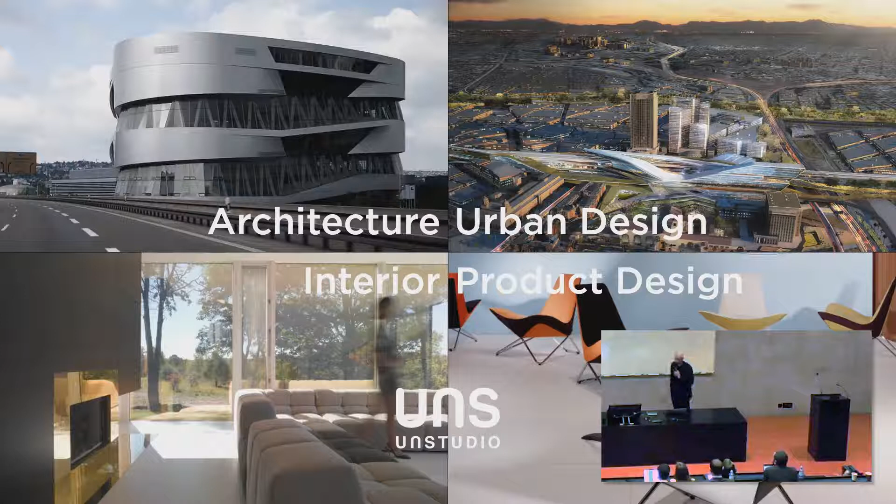Quickly to introduce UNStudio, we are an international company active for more than 30 years. We work in a very broad field between architecture and product design, so we have a really wide span. And what we usually consider ourselves doing, apart from facing the architectural challenge, is that we actually try to challenge architecture.

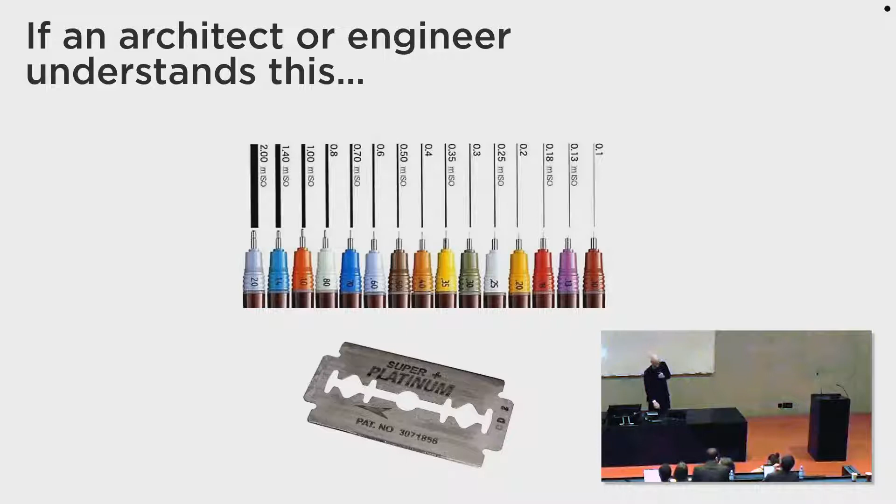I have one question because I started my architectural career at the beginning of 2000, so I'm a little bit from the older generation. What I usually ask to test the temperature in the audience is whether you can relate to that image on the screen. If you can raise your hand, if you can understand that relationship, please. Okay, so it's like 50%, I would say. So you are old, unfortunately. For architects and engineers, there's a similar relationship. Could you raise your hand when you understand that relationship? 1, 2, so a couple. Great. Also here it's the same.

You're unfortunately old. Today I want to discuss a little bit, or let's say my presentation today will be based on a conversation between Tim Melbourne from Made by Many, Oliver Marlowe and John Marshall. They had a very interesting discussion about the ways we design and also what we are designing for, because this very much relates to our own practice.

We of course design for emergence. We have seen this already in the past. We have been designing a lot for complexity, but this is also very apparent because complexity is more and more increasing. We need to be adaptive nowadays, and everything we need to do in collaboration. So I would like to start from emergence.

It's quite clear that anything we do today, also looking at our own projects, is mostly spanning over 10, 15, 20 years, depending on scale and complexity. So you can simply not just expect that what you think of today will be future-proof 10, 20 years down the road. One of our oldest projects actually started in 1996 as a competition and as a master plan, and we just finished it 2 years ago. So there's a long process relating to it, and we need to be aware of that.

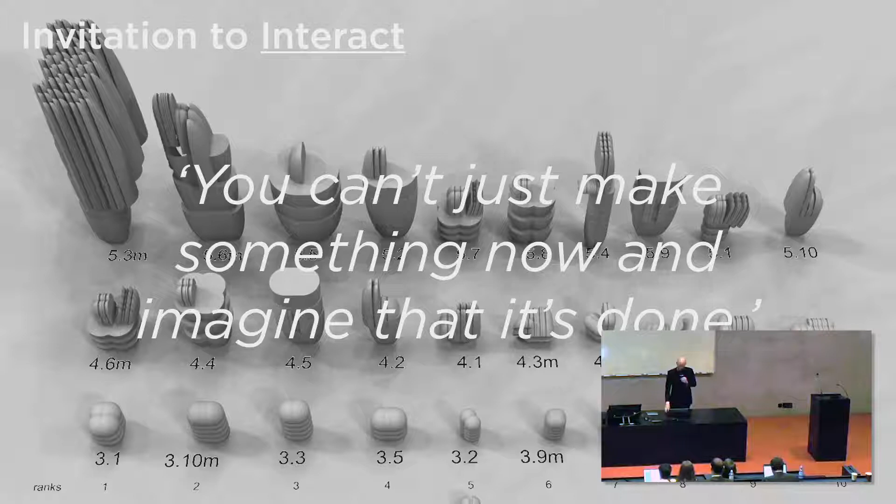And then during the way, there's of course an invitation to interact. So there's a lot of interaction and modification needed, also looking at the markets. When you look at the market, it's not always very clear, and it's not always very understandable what are the driving parameters that really let you estimate and make assumptions for the future. But one thing that is always very apparent, what we noticed in our experience, is that mobility and infrastructure is one of our main focuses, but this is very, very emergent. There's a very high demand to make people mobile and also build the right infrastructure to accommodate this.

So this is the project I had mentioned before, which we started in 1996. It's basically a big transport hub in the city of Arnhem in the Netherlands, on the edge to Germany. It's a bit of a big node where a lot of things are happening in terms of transportation. All the international trains are coming in there. There are buses that need to connect there. There's a lot of pedestrian traffic. So it's a very big machine, so to say, of transportation that we had to think of in a new way.

So there are many components we had to combine and that we had to layer. After we had intensively studied the passenger flows and also all the transport nodes, we actually proposed this new transfer machine, so that we can really think 20 years down the road in order to meet the demands of the 21st century.

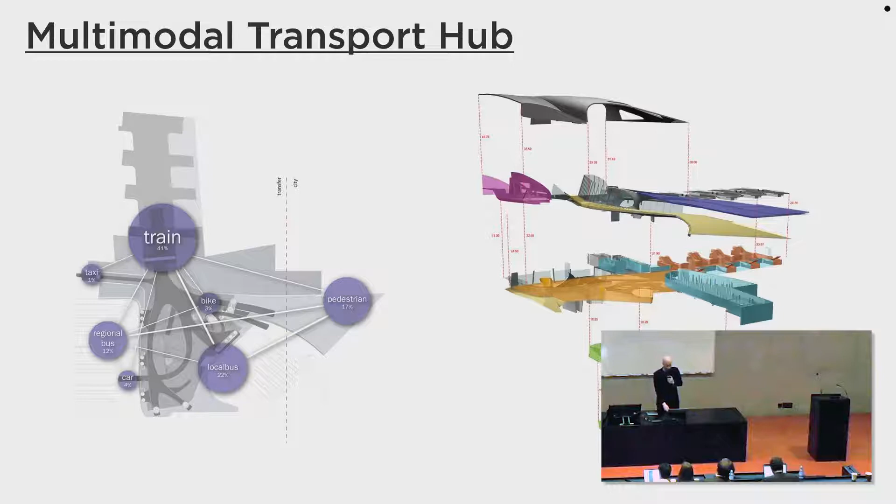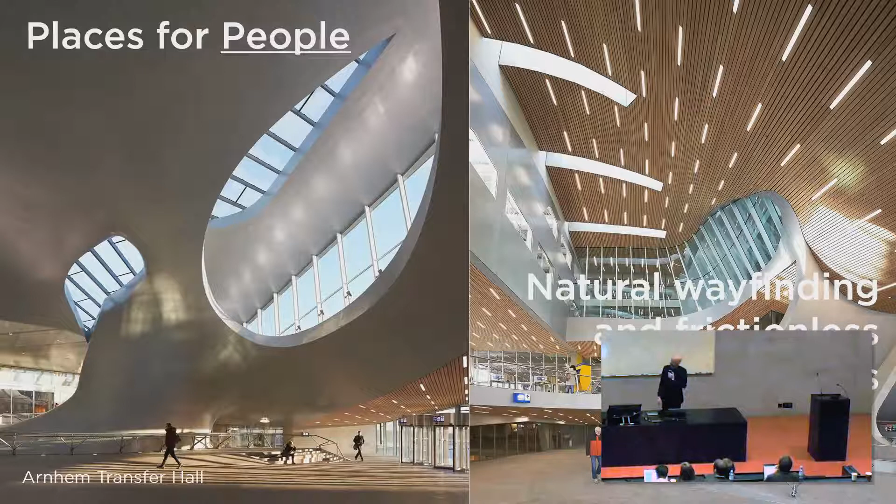So this is basically our transfer hall in Arnhem. It's basically a column-free space. It's the heart of the project, and it forms as an architecturally designed expression. It facilitates an intuitive movement throughout the space.

This allowed us to really reduce the wayfinding. Comparing to that image you saw before, which is simply just wayfinding, we managed to facilitate, through architecture and gesture, the way people move through space. We were able to reduce the actual literal wayfinding by less than 30%. This gives us a seamless experience for people, and allows us to give the places and space back to them. In the way you organize the space, you create a platform for people to interact with the architecture. You'd be quite surprised what happens there.

Same goes for our Mercedes-Benz Museum in Stuttgart, which basically started as a company museum. In the end, it turned out that they are now hosting more than 300 events a year in this place. So it had this additional layer of function and functionality on top of what we had designed back then.

So when we look at it, there's a certain convergence along the way, in terms of where we come from. When I still started to draw by hand, I bought one of those drawing tables, which I used for roughly a month at the beginning of my studies, and then I turned over to the computer and used my drawing table as a base to build physical models. Our CEO used to say, from the architecture point of view, we are kind of in the iPhone age. When we look at industry and go to a construction site, we every now and then face people who are more in the Walkman age.

That said, this convergence is basically turning around every now and then. Wherever you work, because we work very internationally, it depends what the technological standard is. But mostly you need to tailor for the local conditions, and comply with the actual building standard. We have seen over the years many different standards along the way, so you cannot always just get through with digital and technology.

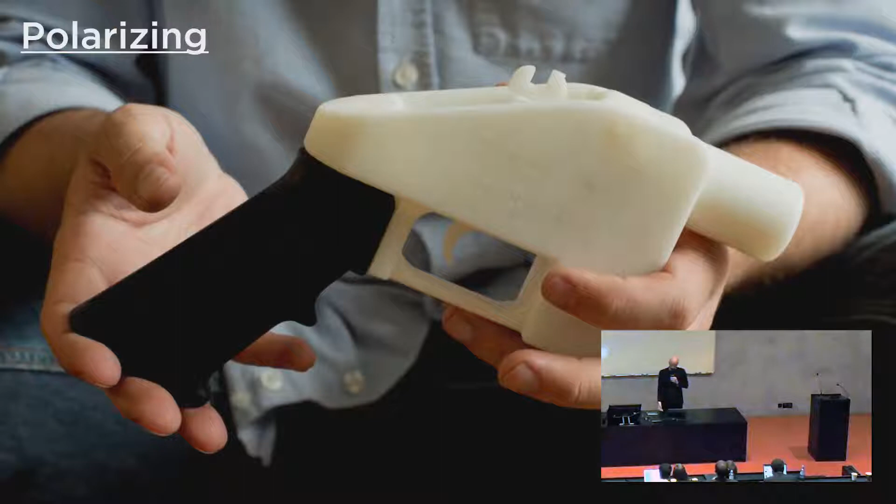Of course, there's also a polarizing factor to it. It also enables you to generate new technologies, or adapt technologies in your home, in your living room, that might be a little bit provocative over time.

There's a lot of hope for artificial intelligence, of course. Until we have solved certain things in AI—probably we'll hear more about it today—whether we have solved the difference between fried chicken and labradoodles. But I think there should still be a human notion to the way we work and the way we design.

When we look at the drivers, just to give an idea, when we start a project, we can come from a very broad angle, and every contemporary architecture firm has to take this broad approach. You always have to develop a concept and a design. You want to be functional, innovative, you want to please the audience or your client. You want to make sure it's an efficient building, properly used, with the post-occupancy really in place. You create new business opportunities and so forth. So it's a very big field of parameters to consider. In another question, you could ask yourself how you want to eat an elephant—you would actually chop that elephant into little pieces.

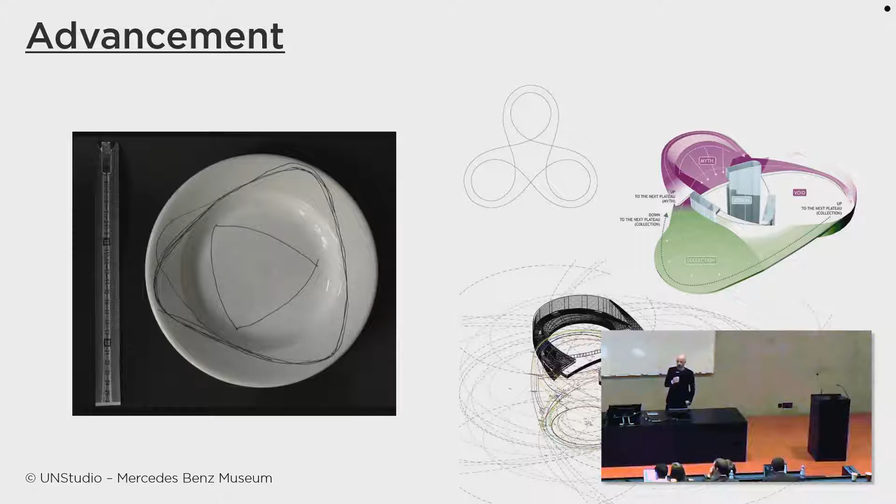When we start our design processes, we always go through a process of resolution. We start from mostly bold ideas, big details—what is our main design objective, and how can we further give resolution over time? When you look at the very first concept for the Mercedes-Benz Museum, on the left, this was basically one of the first ideas, the first sketches, just on a plate. On the right side, you see the kind of complexity this turned out to be.

The Mercedes-Benz Museum itself is a place where we actually combined certain elements in a single gesture. I have been talking about the intuitive flow - this is something we very much followed in this principle, or in this organization of the building. It was a new approach back then in 2002, if I remember correctly. This building fascinated me so much that I had to start working for this company, and it still is one of the most fascinating buildings for me.

The biggest challenge here was the continuous flow, paired with German building regulations - you face hard resistance on fire life safety. So we have this central void where all the program is woven around two strings of program. As you circulate through the building, you constantly move between the outer perimeter and the inner atrium, creating a strong notion of diagonal views and interconnection of spaces, and also understanding and orientation. The biggest challenge was basically not needing to compartmentalize in terms of fire.

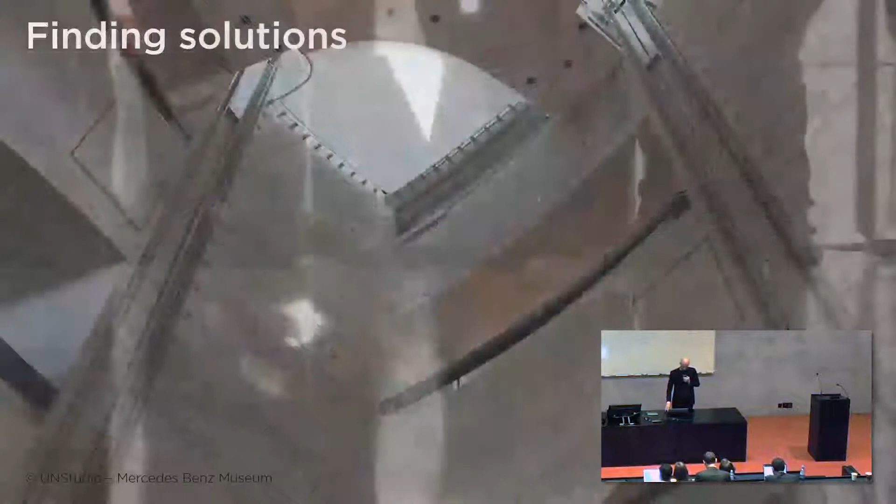So what we, or the team back then, came up with is basically to use the internal atrium as a funnel to, in case of fire, extract the smoke from the inner space, so we wouldn't need any fire shutters or smoke curtains that would diminish the architectural quality. So I would like to play a little video, if it plays.

Just to show you how it was solved in the end.

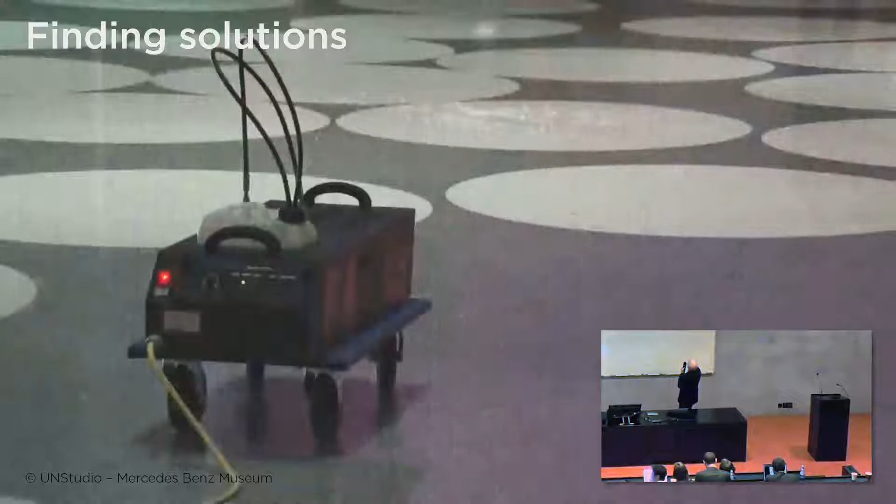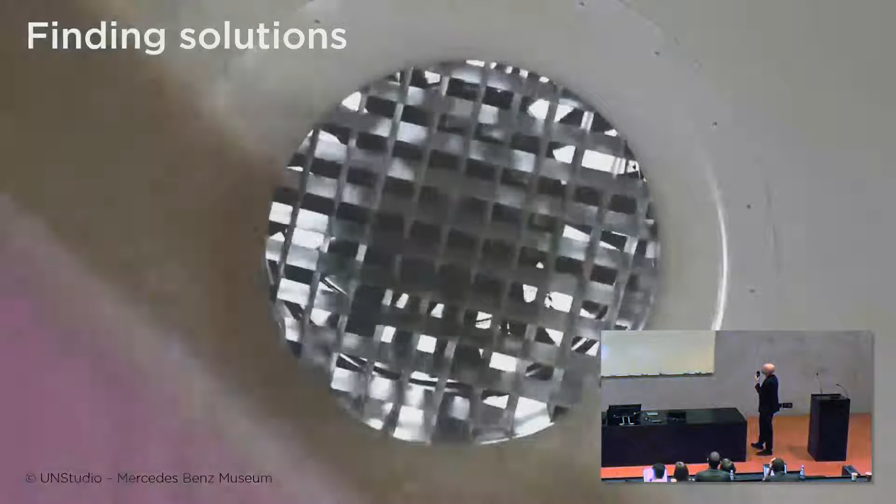This inner atrium is quite important for how you get started into the exhibition - you move upwards. The exhibition itself starts top to bottom, in what they call the prologue space - the before, or how you get into the cultural heritage of the company. Then at the very top, you first meet the horse, as the pre-engine stage.

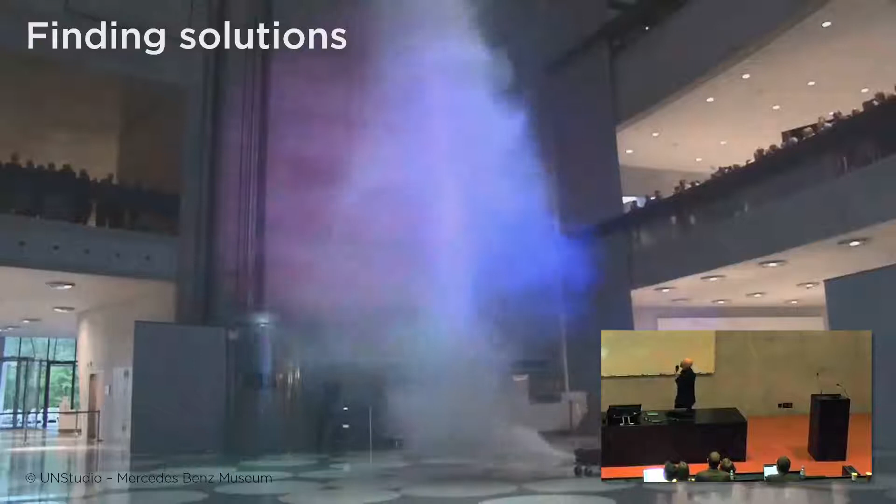Around this atrium, there are a couple of nozzles placed that create an artificial air movement within the space. This air movement moves all the way up, carrying the smoke with it, which is then extracted at the top, in the center of the space. What this generates is, on one side, a very spectacular system.

It allowed us to convince the fire department that this is really a workable solution. Of course, we hope this case will never happen, that this building will never be on fire. But back then, it also created a question to the regulation, in the sense of what are the new ways of thinking about these regulations.

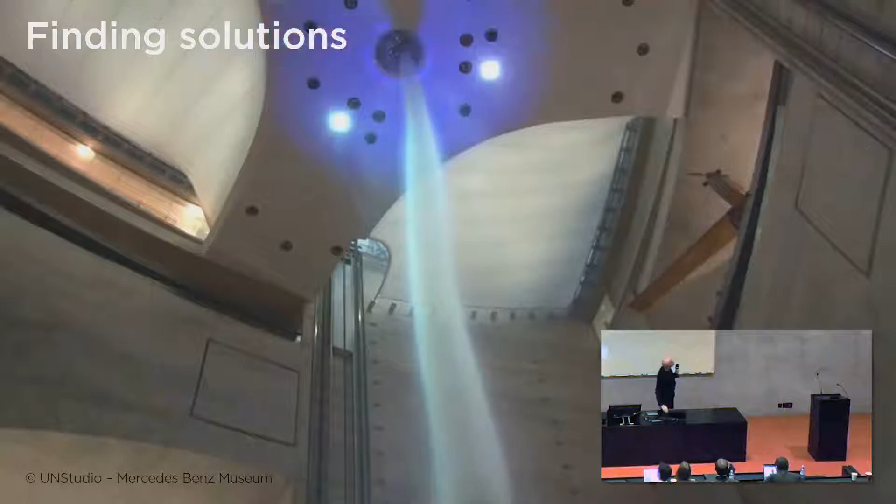It's located in Hangzhou. Up to today, it's still our biggest project, with 400,000 square meters of space - anything you can imagine is in there. It's basically a city in the city, two towers of 250 meters, and we started this in 2007, just after my graduation. We delivered it in 2017.

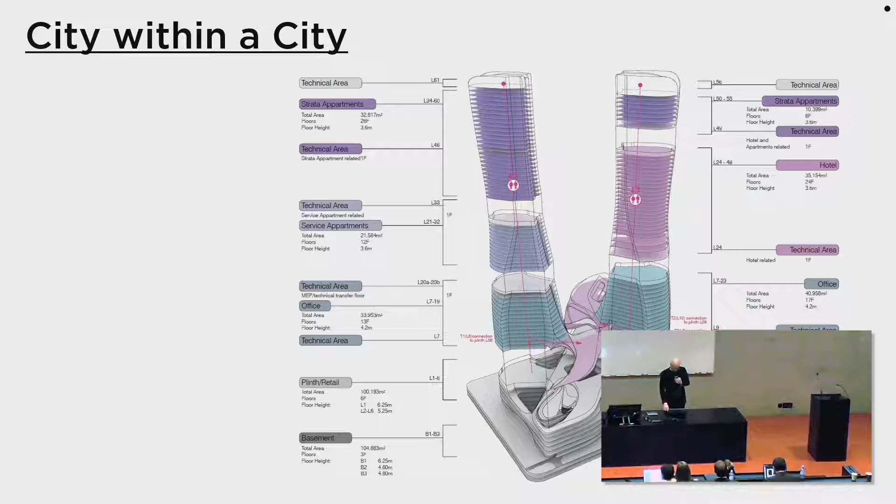Looking at the program mix, as I mentioned, it's literally a city in the city - there's nothing in there that you can't imagine. For today, I'd like to focus on how we actually developed the envelope of this animal. I was talking about the elephant in the beginning, and how we had to chop it up into pieces in order to progress with the design work and get it onto construction.

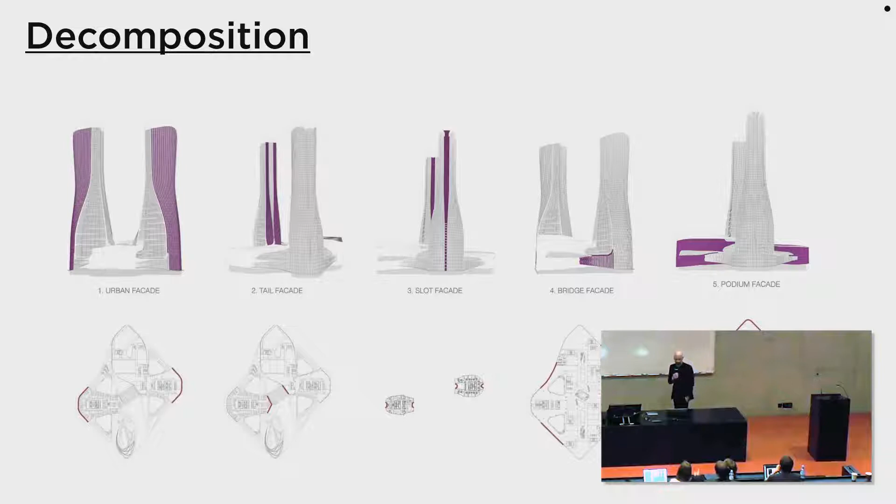So there was a certain process of decomposition. After we had formulated the concept, unified the plots, organized the program and all the flows, the massing was there and the main gestures had been designed or defined. We then had to break down the facades into different components, and based on that, also deliver certain strategies for how we could approach it digitally and technically.

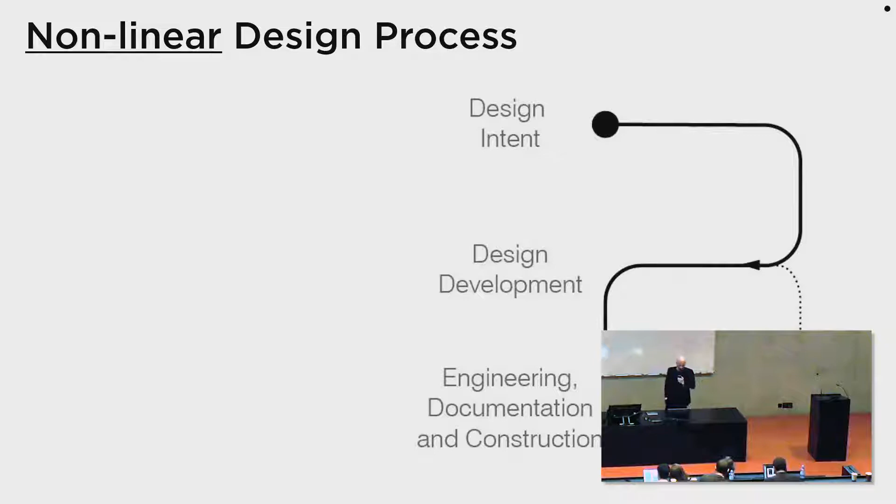So we look at it, again, retrospectively, as a non-linear design process where you actually come with a bold idea. I showed this before with the Mercedes-Benz Museum. You have this plate with a sketch on it, but you need to bring this onto site, and think of all the processes behind it in order to talk to the Chinese contractor that can then, in the end, build it.

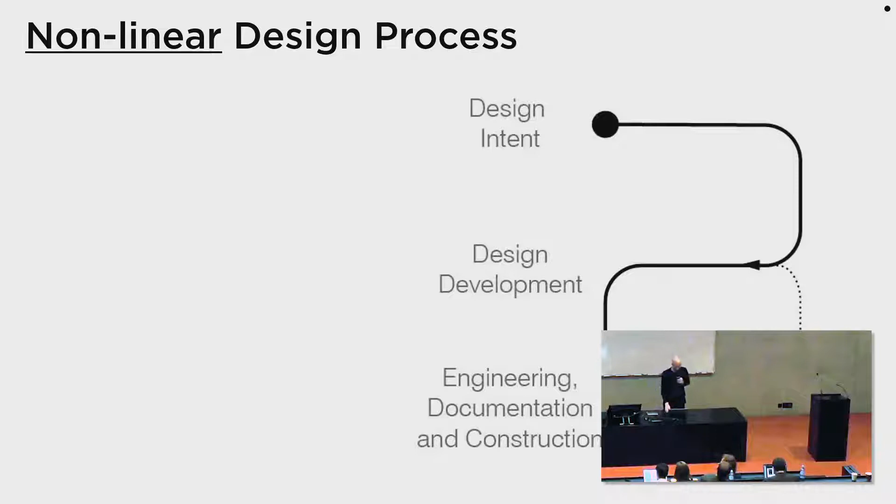So we have this design intent phase where, of course, you can think more boldly. I was talking about the resolution. This is where you spin the ideas. Next stage is the design development stage, and then you circle this through engineering and documentation to construction.

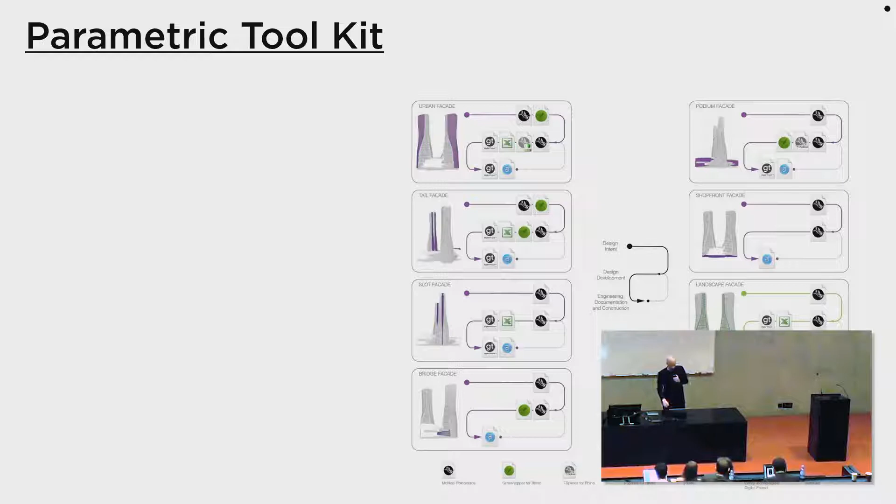So what we had done back then is we developed a kind of parametric toolkit for this. For each of the facades, there's a certain process for particular stages of the design, and this we had to really do case by case.

So I want to throw a little light on the urban facade, which we called urban facade because it's literally facing the urban context, and it has a nice contrapposto gesture, unifying, or let's say moving the flows from the urban placement along the tower.

And how we did this back then, in the first stage during the design intent stage, we were simply modeling in Rhino by hand. It was in the beginning of the Grasshopper plugin, so there was a lot of intuitive form-finding process and so forth.

In the next stage, we further developed our toolkit by actually programming. Back then it was still VB, Rhino Script, and Excel—a very powerful tool, we still use it today.

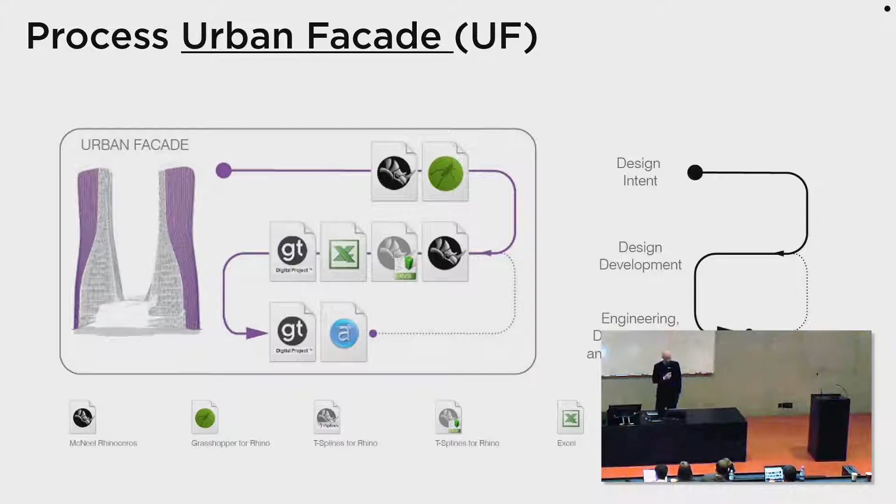It's basically, let's say, top of the bill, but also a very complex piece of architecture that needed a lot of expertise that we had to bring in to do this, because we were just stupid architects back then and not really programmers. And then in the end, this turned out a lot of data that we could use to formulate geometrical data that could be used to start construction.

When you look at the main parameters, I have a little video. If you think about this high-rise tower, you have a lot of stacked program. There are a lot of parameters that play into it, like the floor-to-floor height. You saw that the tower is actually wider at the bottom and more narrow at the top, so we also needed to play with different glass widths. We wanted to have it three-dimensionally curved, so we had tilting and turning in different directions.

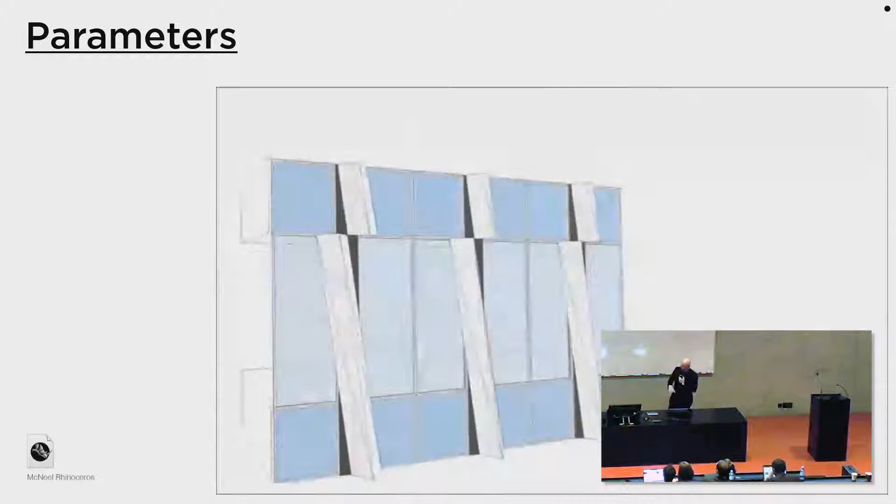Floor packages—in the bottom, for example, you have offices, and in the top, you have residential, so you also need to consider how you react to that. Sun shading is very important for Hangzhou. We have external fins on the outside, which need to correspond to our design intent, but also have a certain thermal performance, rotation, and so forth. So this was a very primary set of the main parameters.

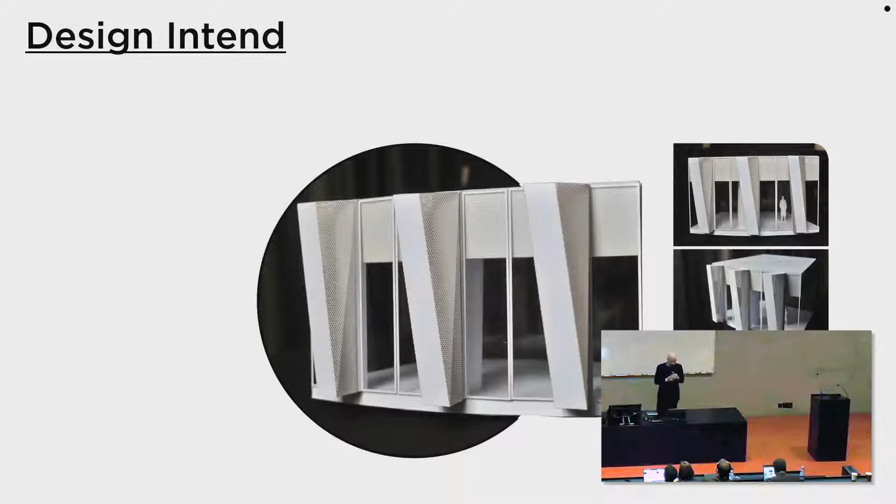Which we—back then, and we still do this today—always try to prove our concepts in physical models, just as simple as that. Very early analysis of the exposure and radiation.

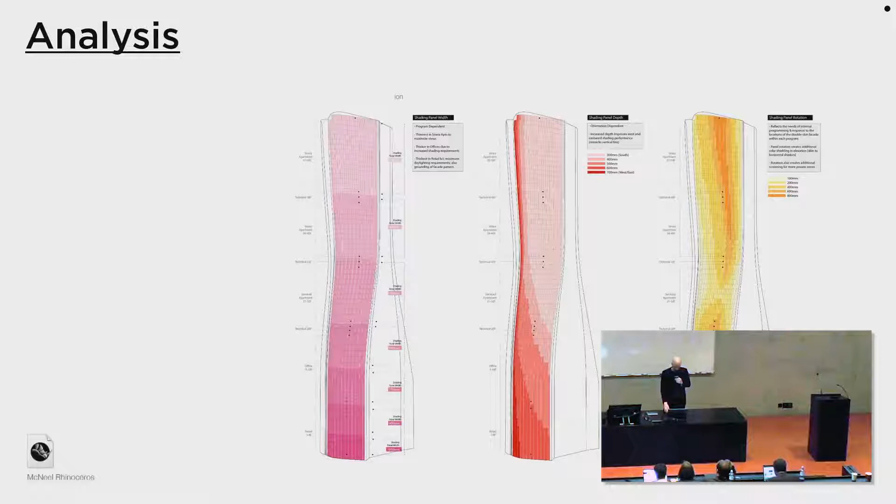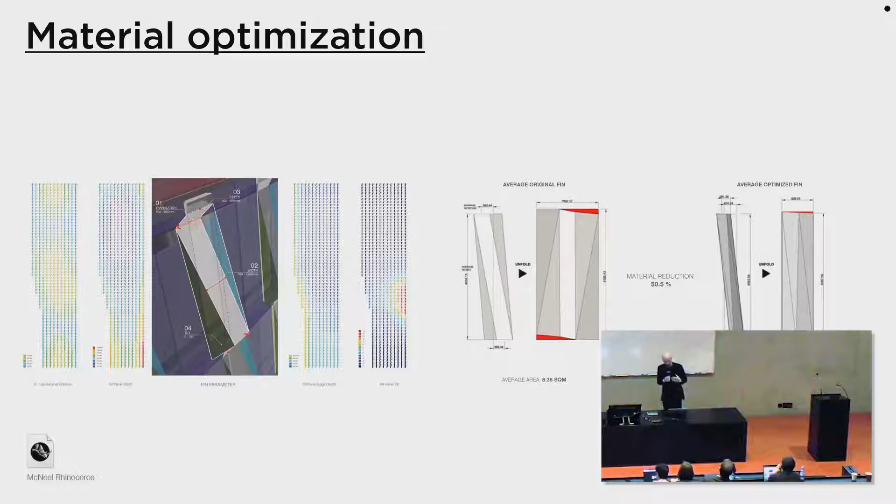And along the way, we already started to do material optimizations, because the client basically told us, okay, that's a great idea, but it's nice that you want to hang this element on the outside—it uses a lot of material. So just by using intelligent processes, we were able to really reduce and cut back the material by 50%, so we could keep our fins, and the client was happy.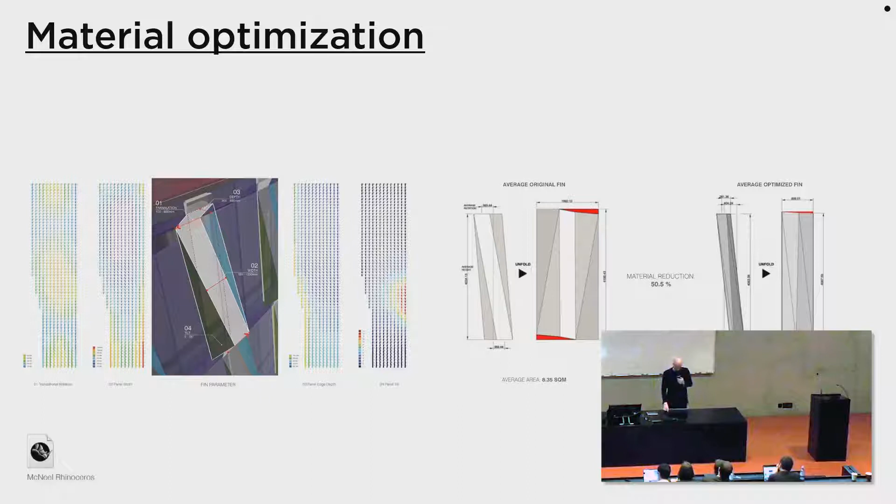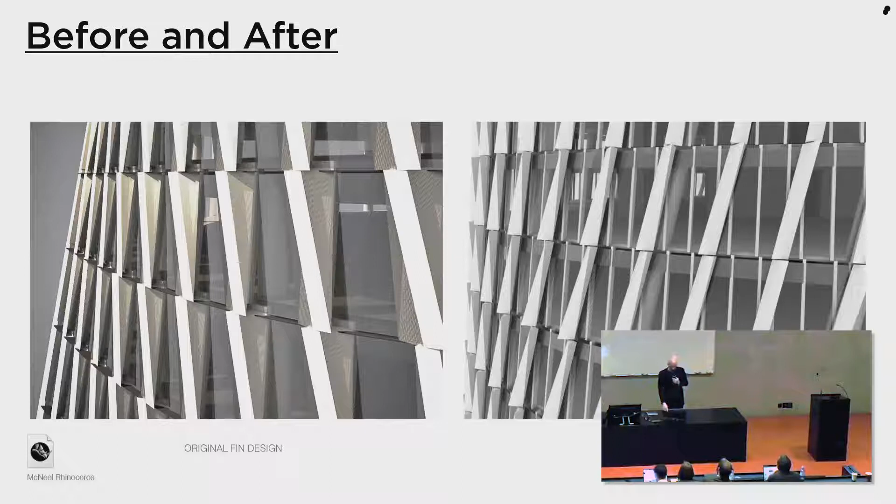You see here before and after how this was improved along the way. We are still in the Rhino stage, where we were still internally programming this ourselves, setting up the infrastructure for the project—the digital infrastructure.

Just an impression. So when we started this, this was one of the first lines of code that were written for the script. It ended up being a lot more lines of code in the end. It was basically a very early intuitive process, just subdividing, iterating, and trying to find the best kind of logic for how to really panelize the surface.

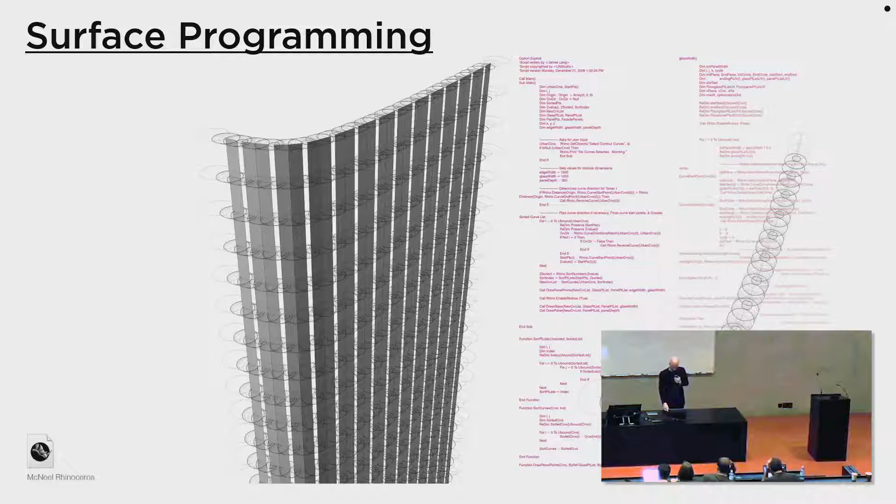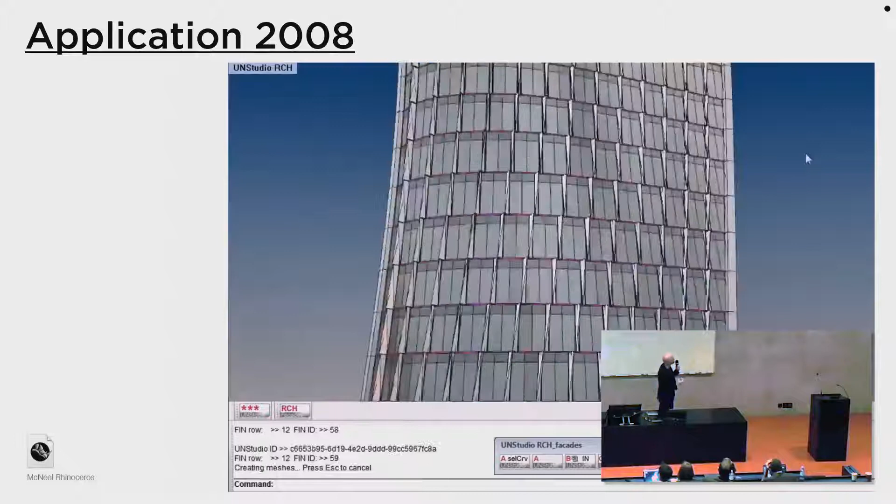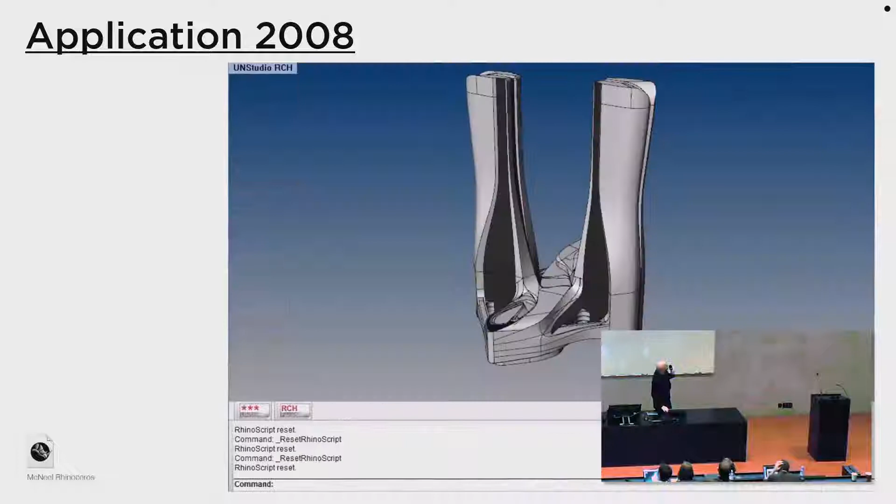I can show you this early application in action. So it's literally just height coordinates. You set out the levels, you have certain insertion points, and we have defined the components. Components always exist as two glass panels, and we combined this with a shading device on the outside, which was always directly linked to Excel so we could really read the data and analyze it at the same time.

This is what I had described before. You have to imagine, back then, this was actually the first kind of step into the history of modeling. Back then, when we were still working very intuitively in Rhino, you model something, and there's not really a history and a path to it that you can go back and forth on.

So this was very new to us, the concept back then. Working with this Digital Project, on top of CATIA, is to understand that you actually need to start from the very first point, and build it up with a certain logic and algorithm on top of that. But you can also move forward and backward. This back then allowed us to extract a lot of data from our model.

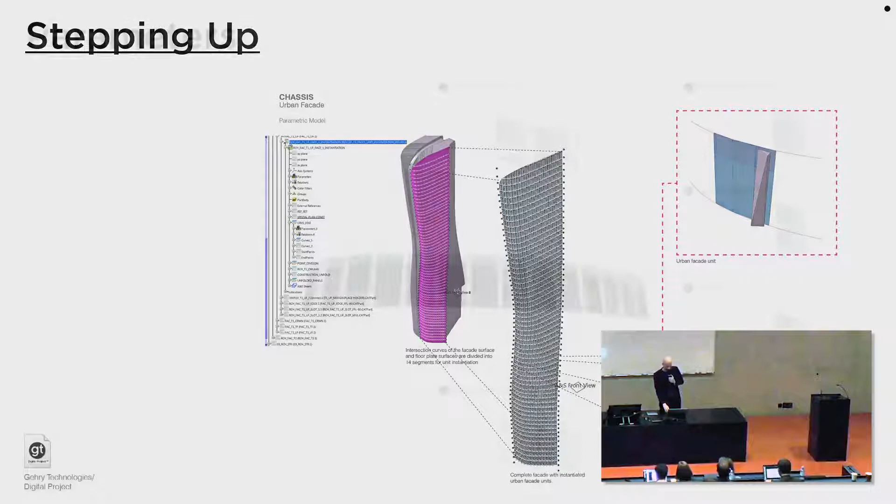So when we started to look into the urban facade, we had to break it down into certain parameters, because the client came back to us and said, it's wonderful how you've designed this, but we really cannot bring this to site, because all the details are different, all the mullions have different angles, and we'd need to do like 900 different aluminum extrusions for the facade contractor to build it. So we needed to dive in, and for each element decompose it and see where we could optimize, where we could use the computer to be intelligent for us, and find a sweet spot in the detailing.

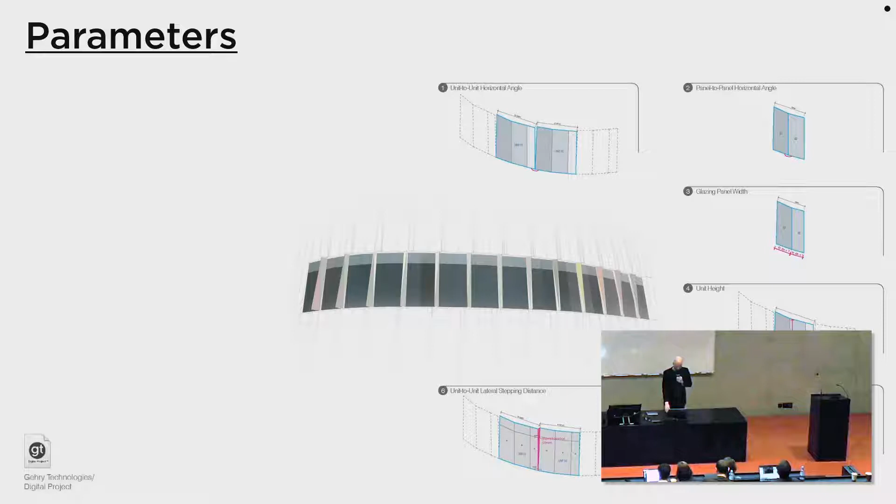So there's a set of parameters that we defined and identified. This was our way of working. This is one example where we actually optimized the angle between two adjacent panels. We started really from 900 something different angles, which is something you cannot really accommodate anymore given certain tolerances in the mullions between these elements. So we had a lot of algorithm instantiating these units.

And they were then optimizing, or finding this sweet spot, which is represented in the Excel sheet. So this was something we looked at for a very long time, in terms of how can we really optimize it, and what can Digital Project do for us, and how can we bring in the intelligence so that we can program it in the most efficient way.

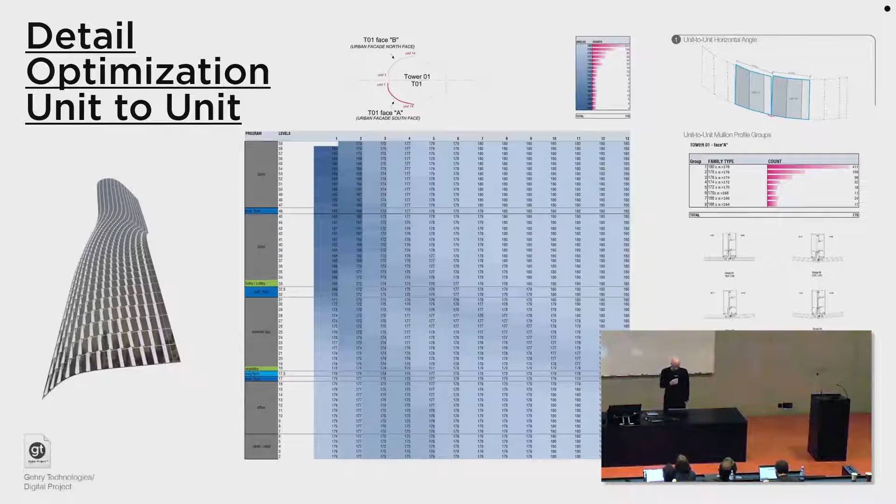So if you look at it on the lower right, you basically see what we came up with, or what it ended up with. We managed to break down 900 different details that were needed before we started this process into 8 different angles that the tolerances between these elements were able to accommodate. This is something that is very manageable for a company to build and to produce.

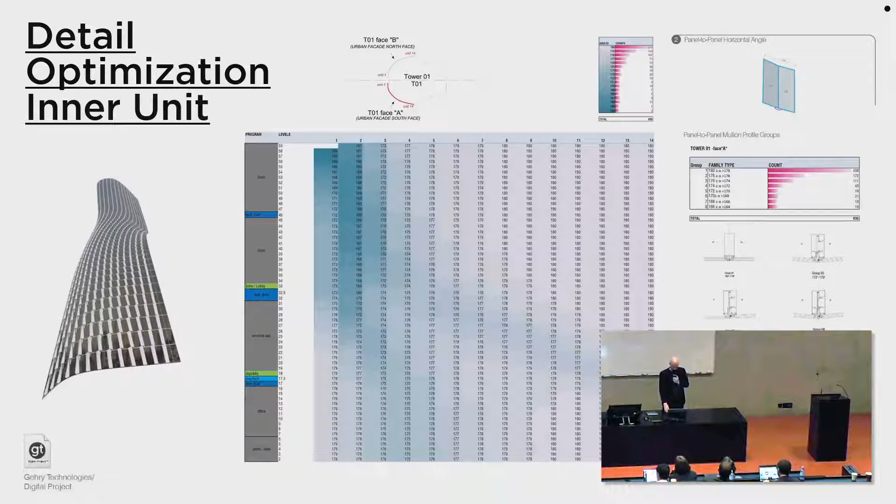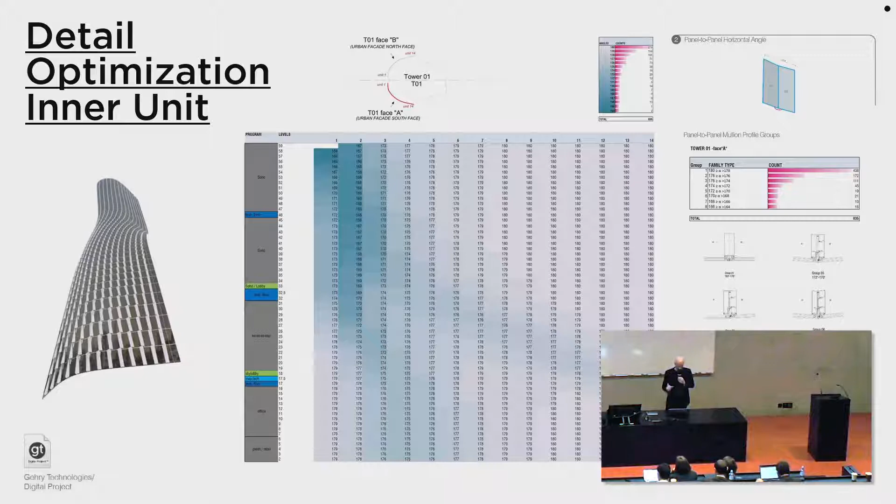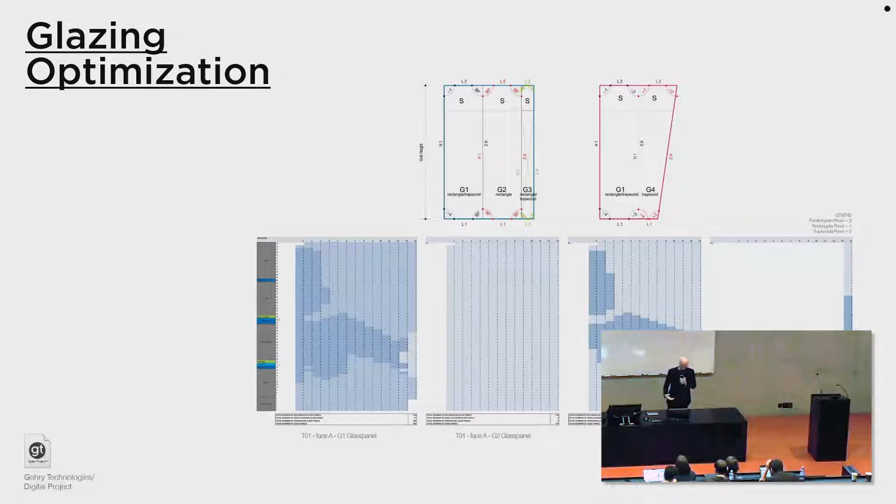But then, of course, this is only one part of the whole chain, because there's not just an angle between two elements, but also inside the element you have the same angle, the same game, and you try to optimize it in the same way. All these different parameters are nicely interrelated, and they all want to be talking to each other. The same goes for glass optimization. We know that as soon as you cut a glass piece on one side, you pay extra, so we need to make sure we can use as much as possible regular panels.

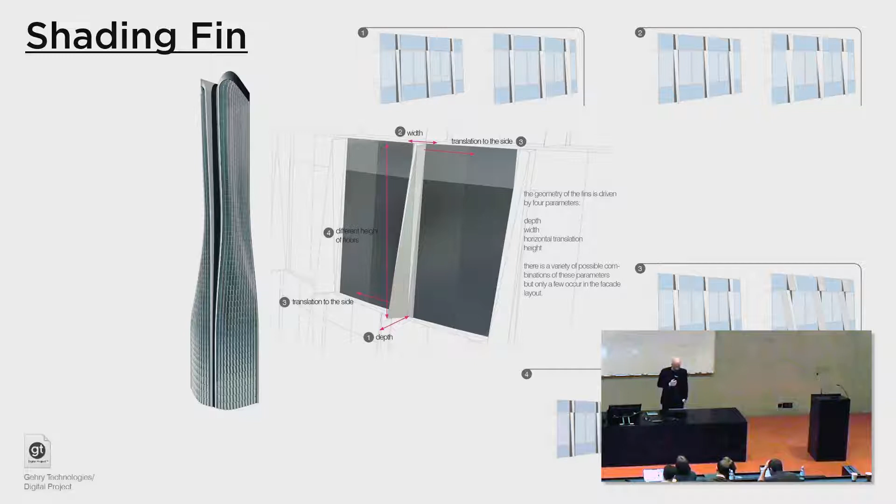For the fin, it was kind of the same logic. We had this transition along the tower, so we wanted to make it as gradual as possible. But there were also certain parameters linked to it, like the fin depth. We had certain thermal performance we needed to reach, which was all solved by one depth based on our analysis. Fine, so first checkpoint.

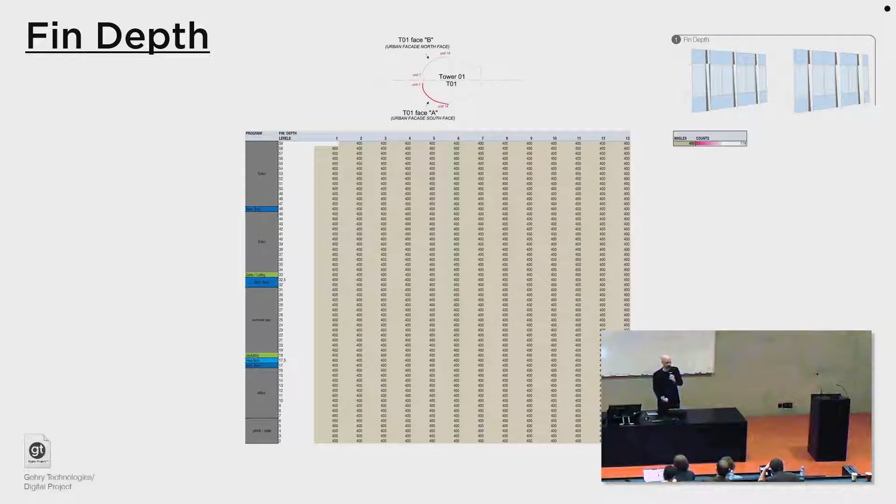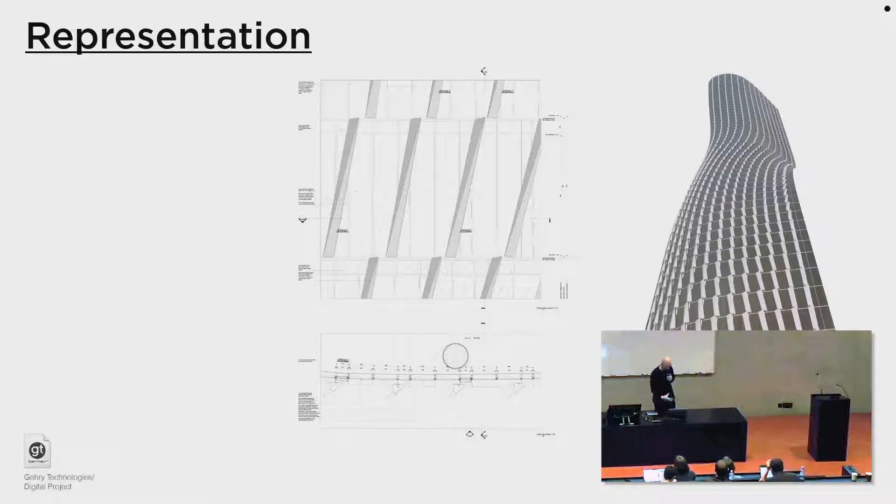And we always kind of proved our concept by mock-ups. Something that we truly believe in is that you need to build one-to-one mock-ups to truly understand the detailing and the way you want to move forward in your digital strategy, in order to really progress and build the full building on site. Let me give you a little bit of an idea.

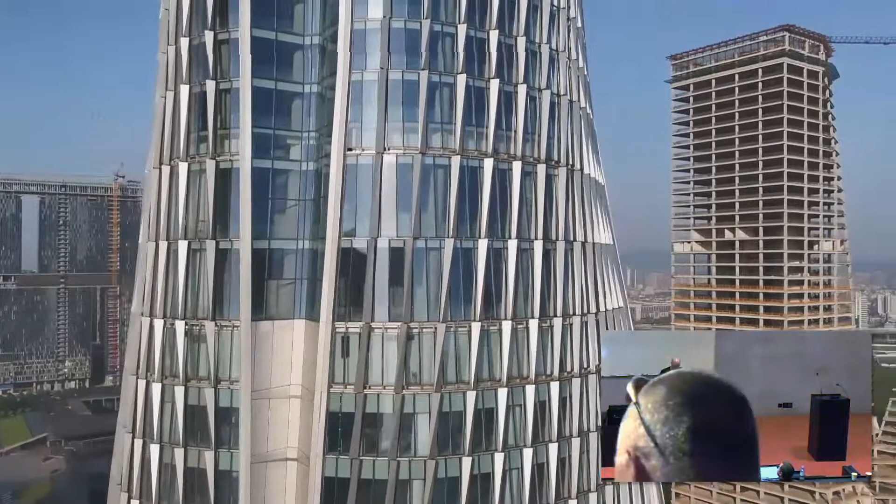This is something that we, again, could not really anticipate in 2007 when we started this project, is the way you look at buildings. Of course, with a building with 2 towers on top, you will be able to look down. But nowadays we are designing the 5th facade, which you can now see due to drone photography and film footage. So we had to make sure that there's not too much technical area exposed to be seen from the top. Back then already, we needed to look at it from all sides.

I want to move forward to the adaptivity, and how often it is a very underserved need. You need to prepare for the future, and you need to speculate. Because if you are adaptive, and if you can act on or think on your toes, you can actually solve anything, I would say. So at UNStudio we mostly think in systems and components, and I think we will hear much more about this today. Basically, design has to change in each of its parts and disciplines, so that we can spill over and think continuously in our design process.

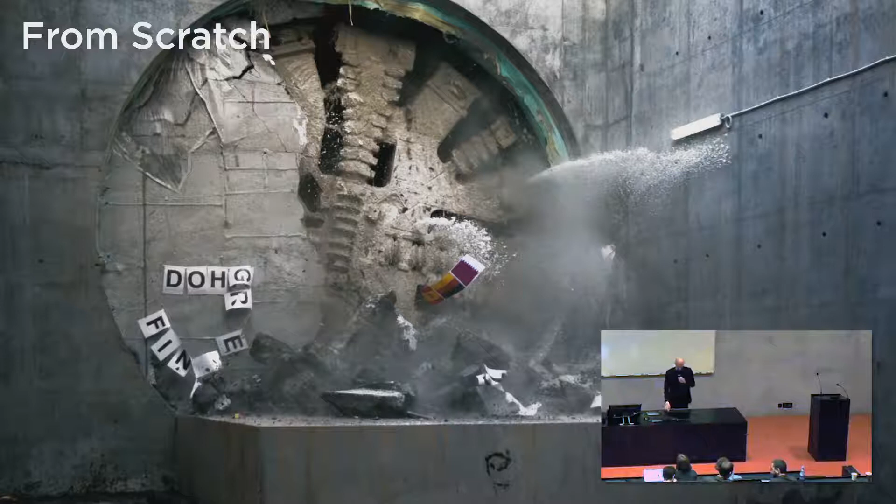When we started, we did a competition in 2012 for the Doha metro network, which was supposed to cater for the World Cup. There was nothing there, basically, not even the tunnels back then. So we were supposed to make a design for 32 stations in the first phase, and then up to 72 stations in the second phase, which is something you cannot really comprehend as an architect, to design so many stations.

So we came up with the idea that we could actually make a manual. Nowadays when you go to IKEA, you get this nice manual, so you know in a generic way how you can build up your stools. So what we did back then was a kind of reference design. We designed everything, from the large shelter on the outside to the trash bin. And this was eventually handed over to 5 contractor consortiums in order to construct this.

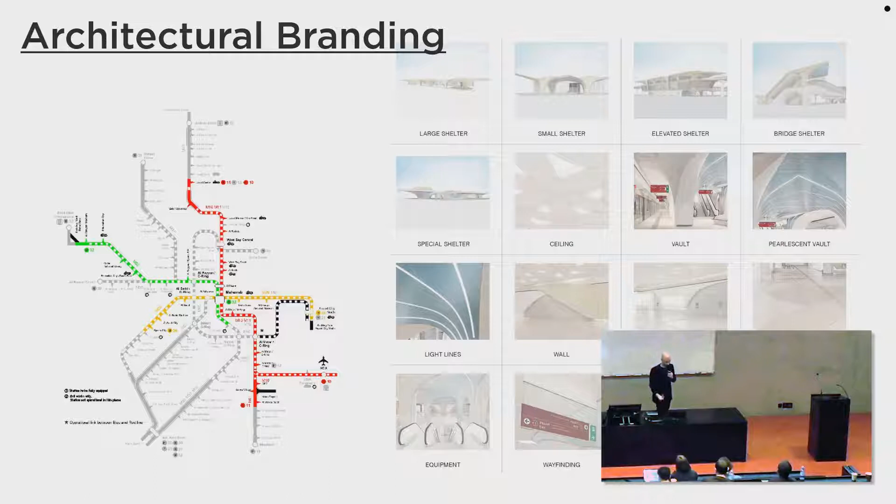So how do you do this when you think of a design, and you need to tell 5 different conglomerates in the end how they have to build it, so that all the different stations and all the different locations will comply to your design intent, because we were responsible for the overall design? So you have to make a manual.

I don't want to flip with you through all these pages, but I want to give you a quick impression of what this meant. It's a bit of a fast video, so if you have a weak heart, you should close your eyes for a moment.

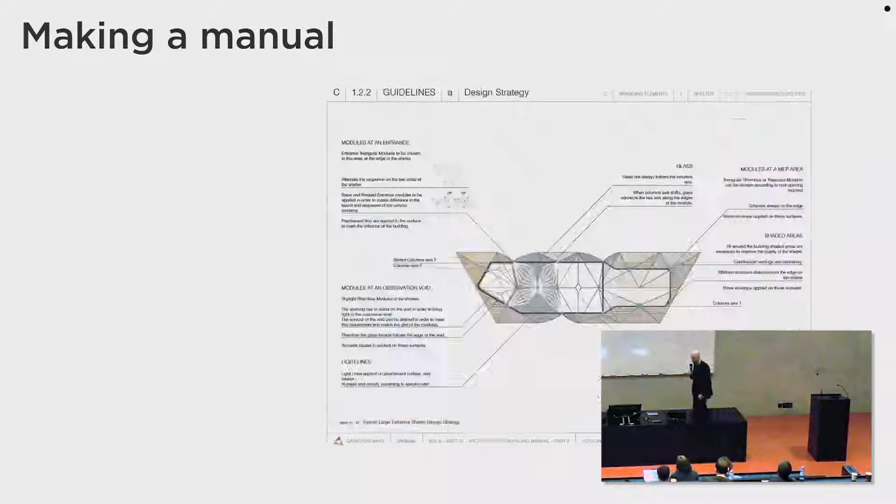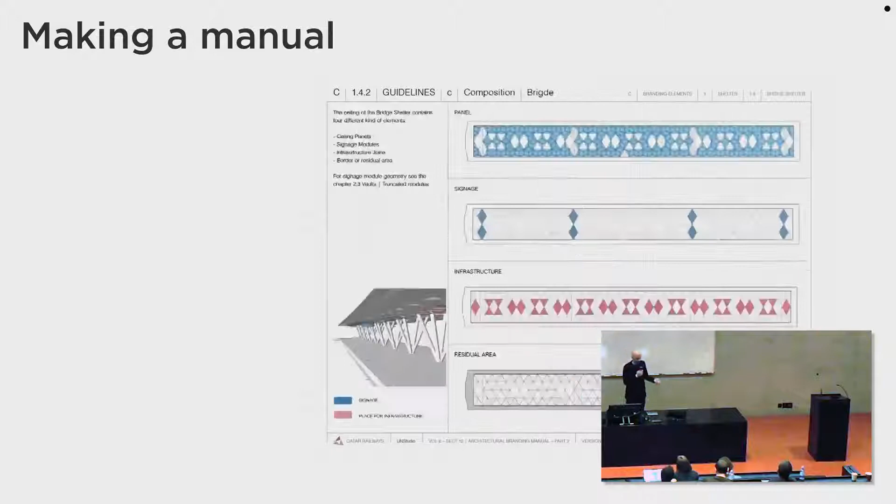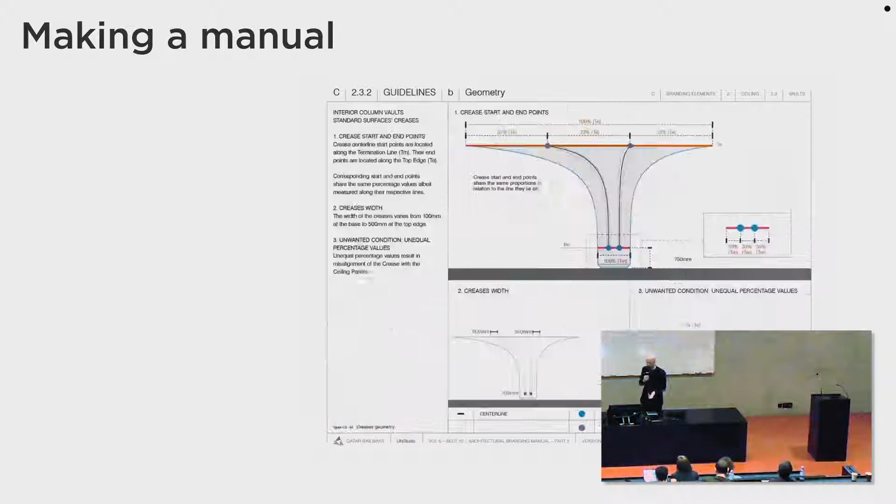So the main challenge here was really to think of a geometric rule that everybody could understand - let's say the contractor was able to understand it, the architect of the contractor was able to interpret it according to our idea, and then this across 5 different architects. So how do you describe something that doesn't allow for any mistakes? That was basically the biggest challenge. Writing a manual was really a big challenge for us, but it really allowed us to comprehend and to get our design intent across.

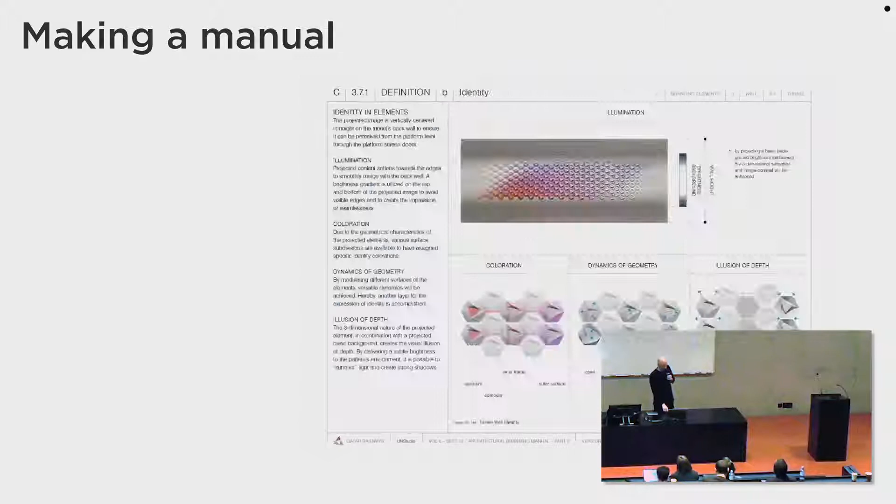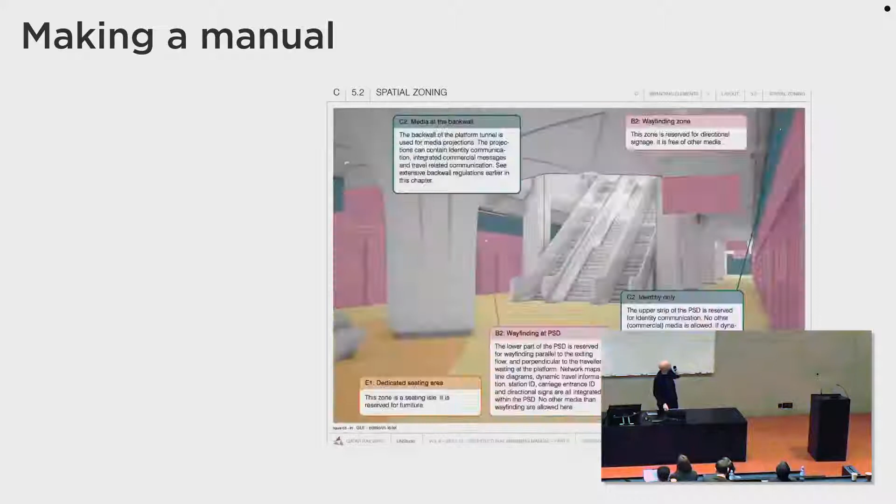So the first stations just opened recently, and it looks very convincing. I think we succeeded in making a manual. It was our first time, and now we take this into our design process, thinking of a way in which we can explain our ideas or convey our ideas in a very explanatory way.

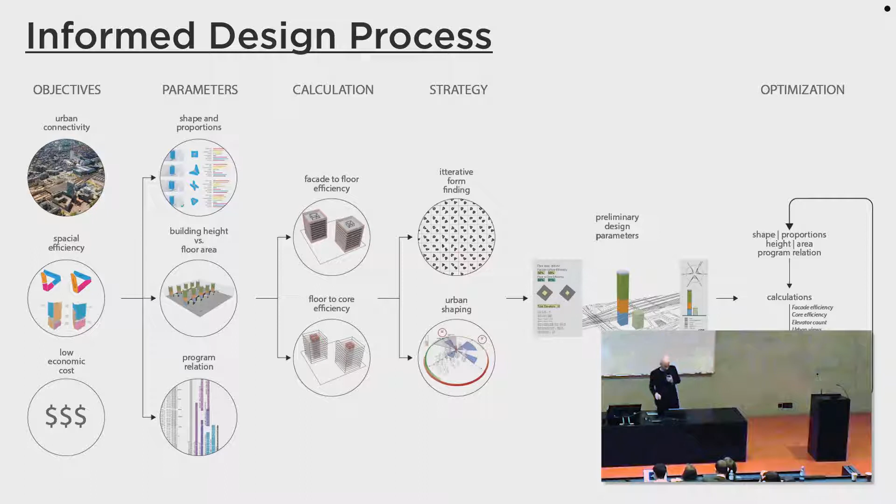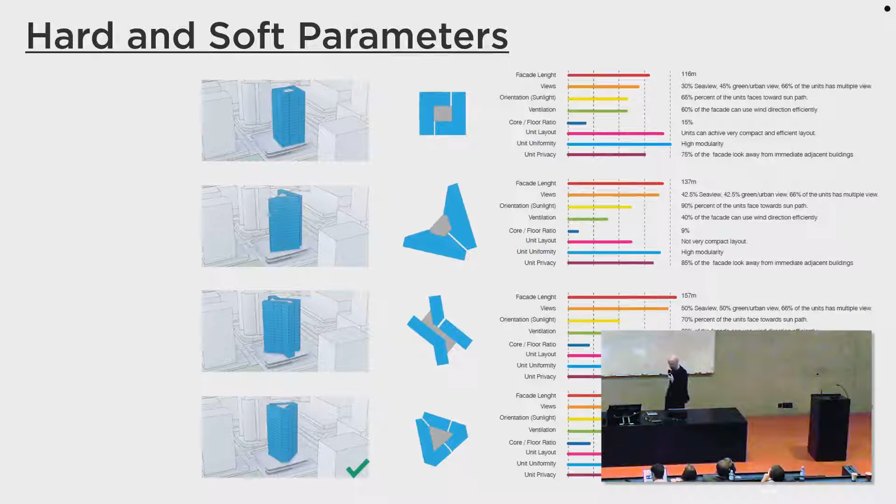When we look at our design processes, we of course start from the main objectives in the beginning. So this is where we want to go with this, what is the most important parameters, that we then break down in the next stage. There's always a calculation component to it, and for this calculation component you also develop a strategy that then fuses into this overall model. And then we mostly iterate within this and try to further optimize it. There are, of course, hard and soft parameters - parameters that are more difficult to quantify, and parameters which are more easy to quantify.

We do this in a very intuitive way. Does it play?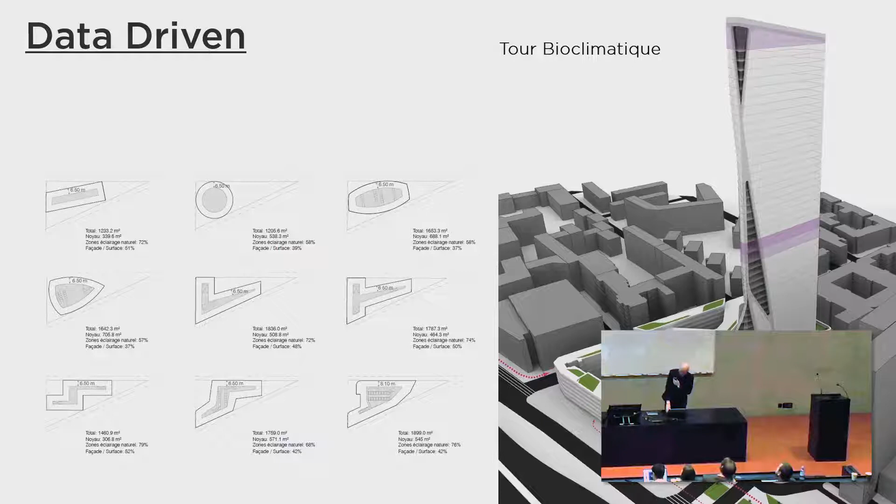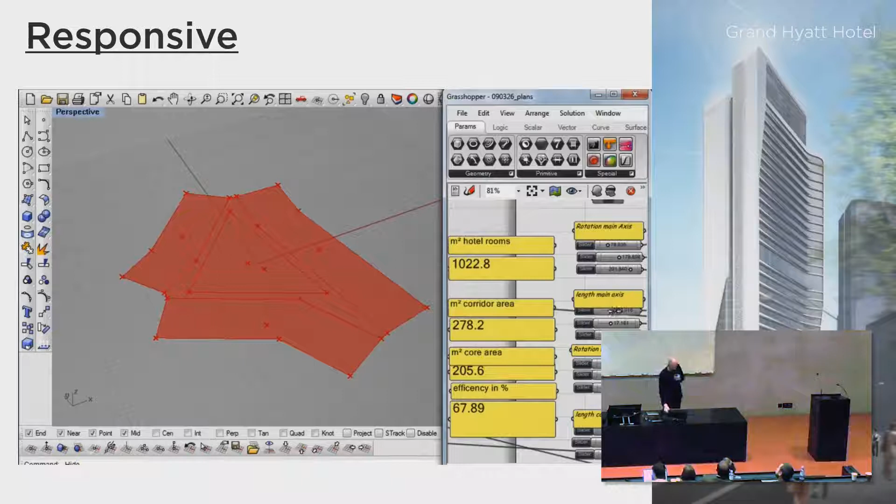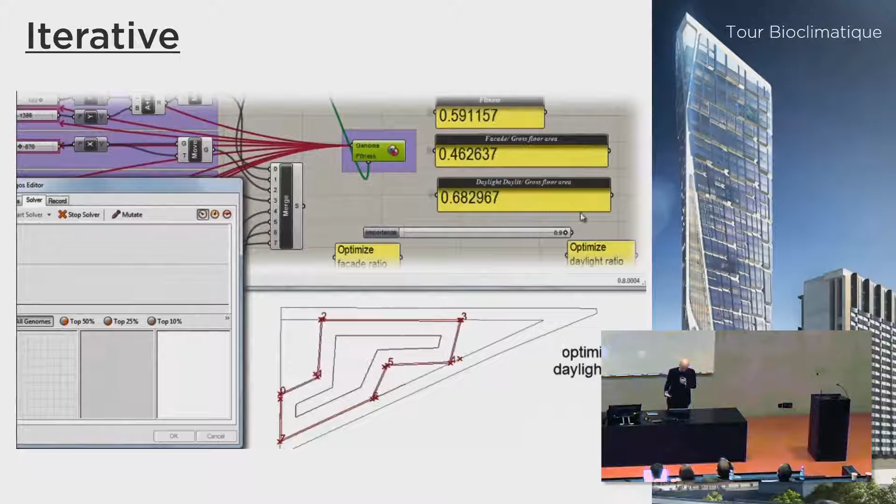We do this in very visual, intuitive ways, so that we get direct feedback from our design models. We also do this with algorithm, or let's say solver solutions. But it's not just that the solver is solving our design issue or main question for the project—it's really about optimizing within our bigger idea.

We also do this on the urban scale. This is a project we recently delivered the schematic design for. It's fairly interesting because it's literally bringing what you know from the mountains, from ski areas—the cable cars—into the city as a form of urban or public transportation. This wasn't meant to be a gimmick or tourist attraction; it was meant to be robust and live for 50 to 100 years, providing a real solution for the public transport needs of the city of Gothenburg.

It's quite a daring, pioneering approach for a city to take, but we were excited to get selected to follow up on this project, because one of our main interests is always mobility and urban infrastructure.

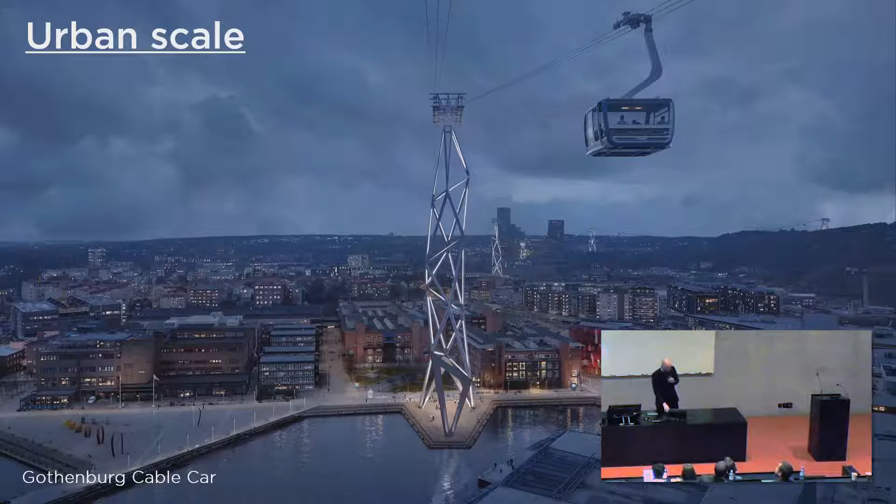When we started working on this project, we looked at the city of Gothenburg, which is a harbor city, and what's apparent once you're there are all the cranes along the riverfront. That was very inspiring—the dynamic movement, how the crane looks in the morning versus how it ends up in the evening.

We took this as a pickup line for our tower design—to build something into the skyline that relates to what's already there, without becoming a strange object in the skyline, while still giving us a contemporary twist in how we interpret this.

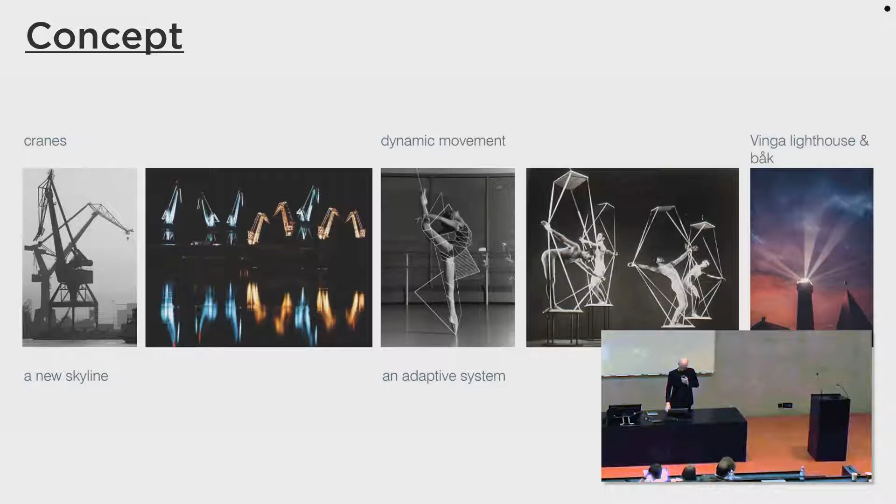We started from very simple barbecue stick models just to follow up on an idea, developing the geometry—a monolithic, primitive geometry assembled in a particular way—which we then had to break down and decompose into additional components.

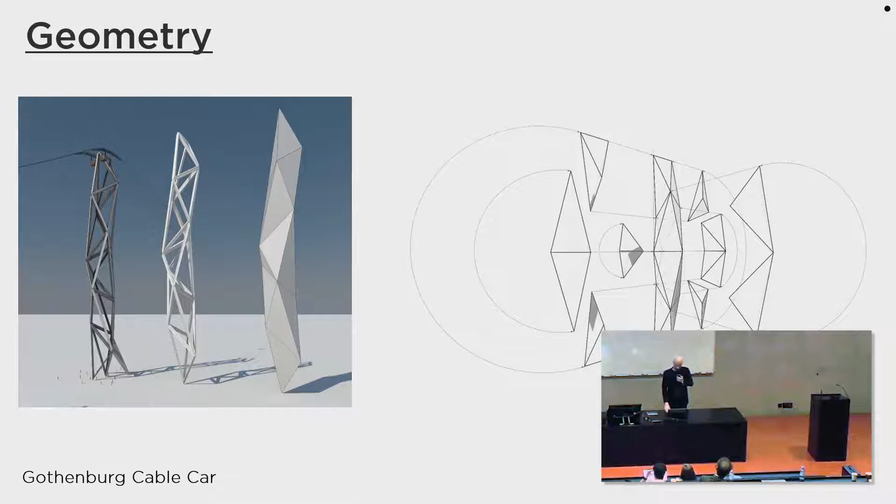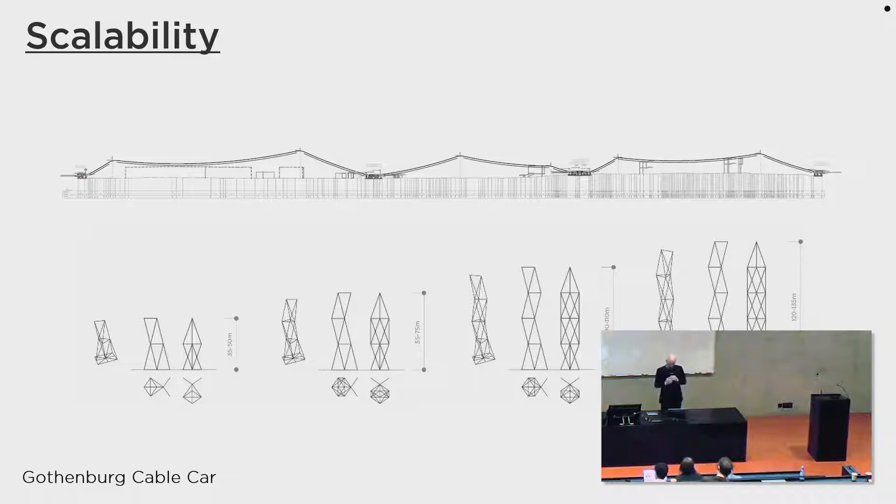What was crucial here, looking at the whole track of the cable car, was that we needed to implement a certain scalability. These towers had to grow, and to make construction efficient, you need to think about repetition of elements and components, and how you want to assemble them.

When you move these towers through an urban context, you need to deal with a lot of flexibility. Sometimes it's sitting on the water's edge, sometimes within traffic, sometimes just on the side of the road. So there needs to be a lot of flexibility in how we place these towers and set them into the ground.

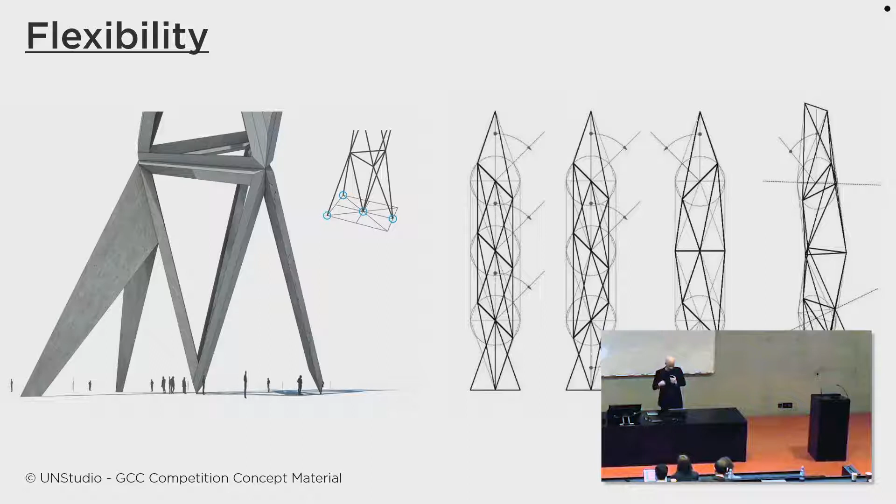Of course, we also had a certain design intent—in the end it's not a crane, it's a tower, and there's a lot of dynamic and static loads that need to be controlled. But we also had a certain angle we wanted to look at these towers from, so within the system we developed quite a lot of flexibility.

Modularity—I've been talking about this, and it's really important. We started with a funny idea because we wanted to make these towers from concrete. There's a company in the south of Germany that does spun concrete. When you drive along the highway, you usually see these big poles holding up the IKEA sign or the Golden M for McDonald's—those 30-40 meter high poles are mostly made from spun concrete.

Spun concrete works like this: you put a rebar into a long tube, mostly welded with a robot. The tube has two halves, bottom and top, forming a mold. You fill in the concrete, close the tube, and then start spinning it like a washing machine.

So what this allows is it creates a very high density of the concrete, and you get very, very thin cross-sections. So this was our idea in the beginning, that okay, let's try this because you don't need to maintain it. We are in a harbor city, we're close to the ocean, there's salt in the air that can lead very quickly to corrosion. So we had the idea that this is very good in terms of maintenance and life expectancy of these structures, because they needed to be laid out for like 100 years.

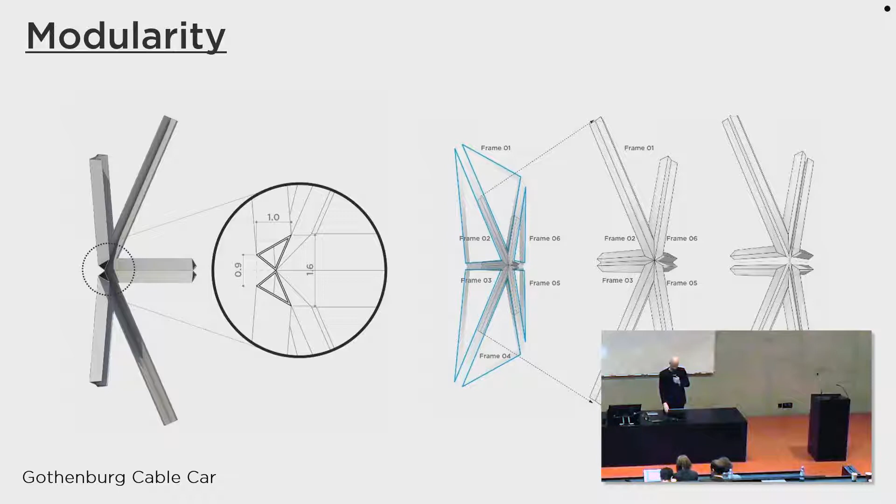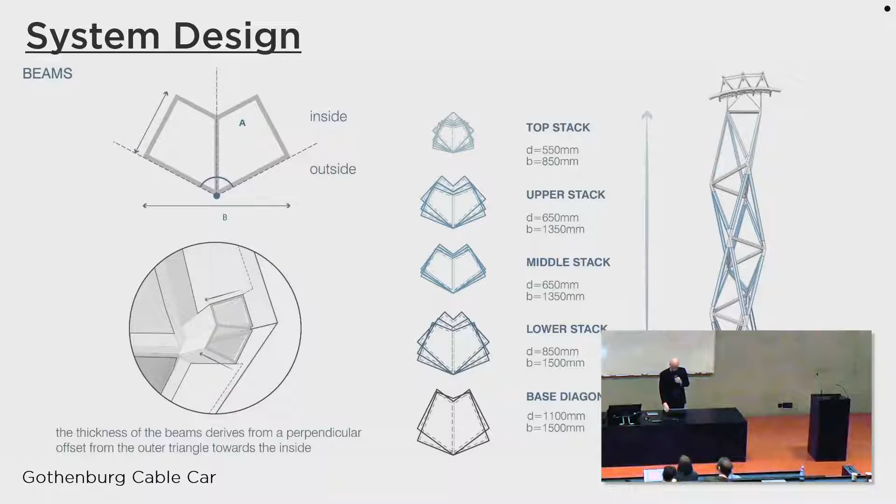Unfortunately, I have to disappoint you because in the end it turned out to be steel. Just from an economic standpoint, it was not really feasible to deal with one company and drive all these 30-meter long columns from the south of Germany all the way up to Gothenburg. So now we look at steel, but still the logic and the initial ideas are still in there.

I think I'm running out of time, so I want to wrap this up.

With maybe the most crucial piece in our practice, or in the challenges we face nowadays, is that we do everything in collaboration. This is already how UNStudio was initiated at the end of, or in, 1998 - it's kind of a united network. It's the way how people work together. And you could basically say that collaboration is a very unnatural act between unconsenting adults. So there are a lot of terms flying around, like collective impact, aligned actions, social impact networks, multi-stakeholder partnerships. You can call this in many, many ways.

But at the end of the day, you need to make the 'we' work, in order to build really smart and collaborative relationships so that you can move forward efficiently on the long haul.

How we do that - we are a knowledge-based company, so we truly believe in research. On one side we have to conserve the research that we do, and also develop new domains. Therefore we have a very broad kind of setup.